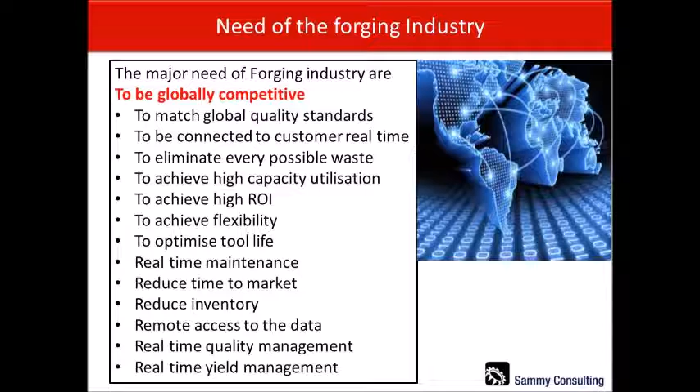Forging is a very high labor intensive and energy intensive process. It is very important that in order to be globally competitive, all kinds of waste from the processes have to be eliminated. This can be done by taking real-time decisions on the shop floor or in the engineering function, and IoT has a big role to play.

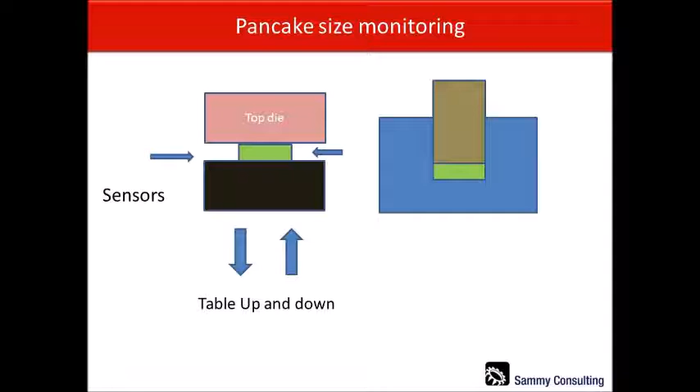In this example, you can see that the sensors are measuring the volume of the die and the weight of the forging, and this information is given in real time to the cutting machine in order to calibrate itself and cut the blanks as per the volume required of the forging die. In such a case, the average weight of the forging goes down, giving at least 2 to 3% saving on the cut weight of the component.

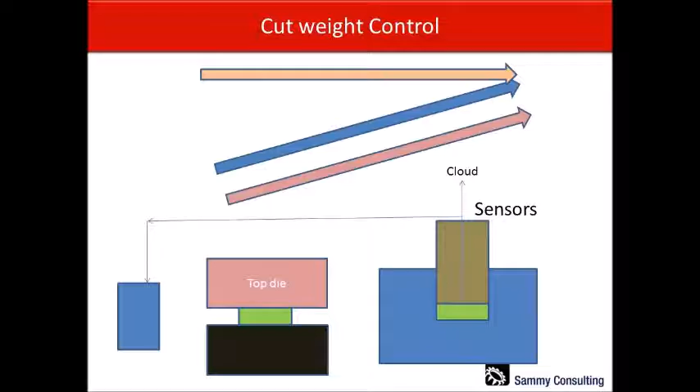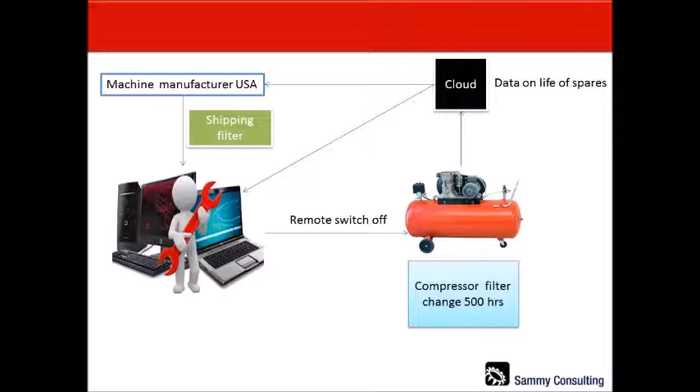This one is an example of maintenance of equipment. As per TPM, if we have decided to change the filter in 500 hours for this compressor, after 500 hours the sensor will give information through SMS or other media to the maintenance manager, who remotely can give instruction to stop the machine, order the filters, or change the filters of the machine, and the machine manufacturer can also keep a record of the same.

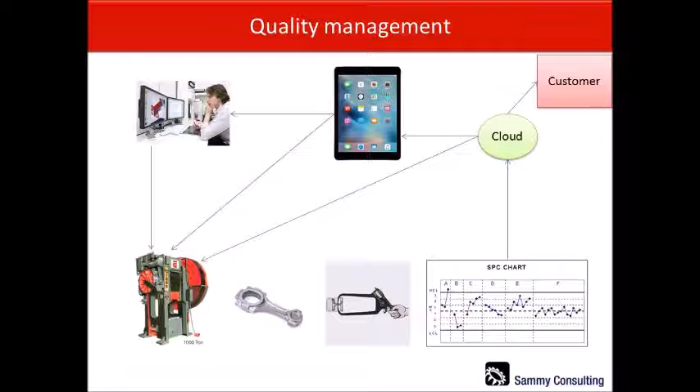This one is the example of online inspection of a variable called thickness, where you measure the hot component with a pistol caliper, and the information is sent to the cloud where the data can be processed into SPC charts. These charts can be used by customers, designers, and quality inspectors in order to come to certain decisions and also maintain traceability of the process, and this is a very useful tool.

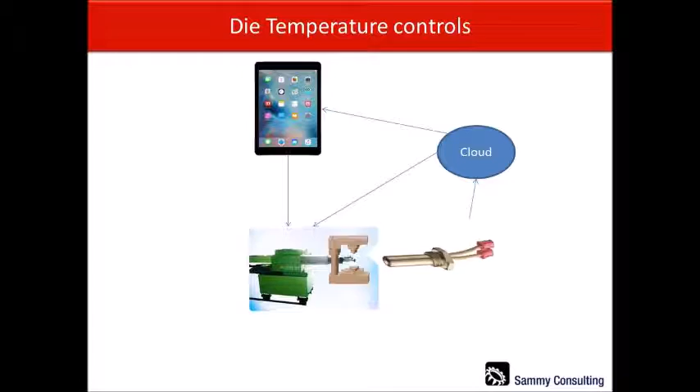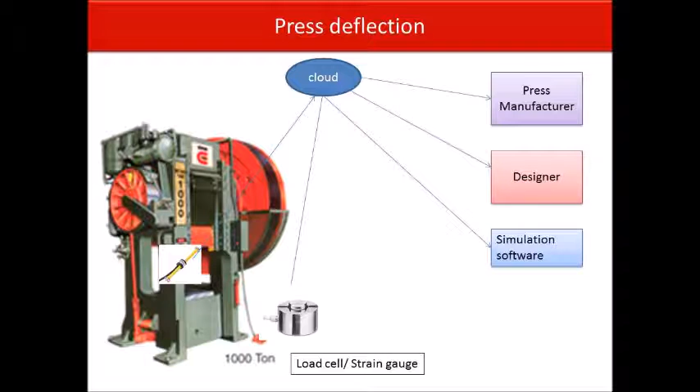The press deflection also plays a major part in the variable that is the thickness of the component. You can use load cell strain gauges on the columns of the presses to measure the deflection taking place in the press, and this data can be shared with the press manufacturer, the designer, and the simulation software designer, who can take real-time data and calibrate their simulation software for a particular equipment.

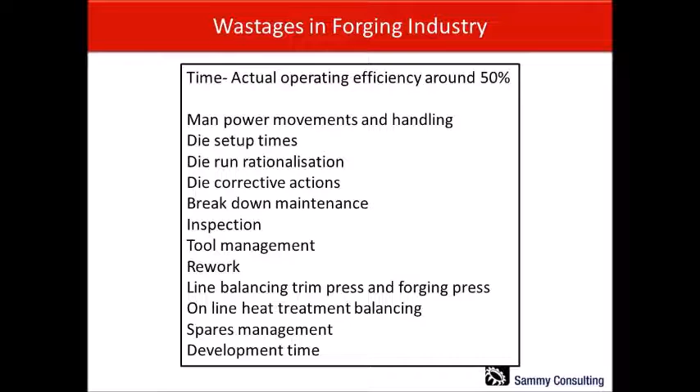Wastages in the forging industry: the actual operating efficiency of any forge would be 50%, due to time wastages from longer die setup times, die corrective actions, breakdown maintenance, delays in inspection, tool management and tool life, development times, spares management, and line balancing of the machines. Real-time corrective actions can really reduce these wastages and improve the operating efficiency.

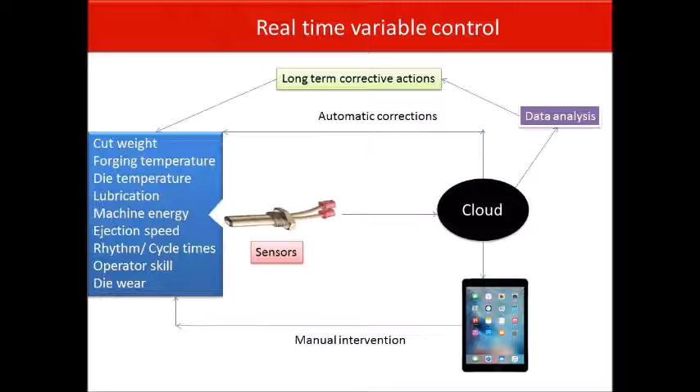Real-time variable control: there are various variables which ultimately control the quality of the forging, like cut weight, forging temperature, die temperature, lubrication, machine energy, ejection speed, operator skills, die wears, etc. Various sensors can pass information to the cloud, allowing manual intervention or automatic correction to take place, and the cloud can analyze this data to help take long-term corrective actions.

There are four major revolutions in industrialization. First is mechanization, second was mass production, third was computer and automation, and fourth is cyber physical systems, which we call IoT. Industry 4 is evolving as a standard or norm to bring consistency in the usage of IoT. There are several software and hardware participants in this IoT revolution, and Industry 4 can help bring standardization among them.

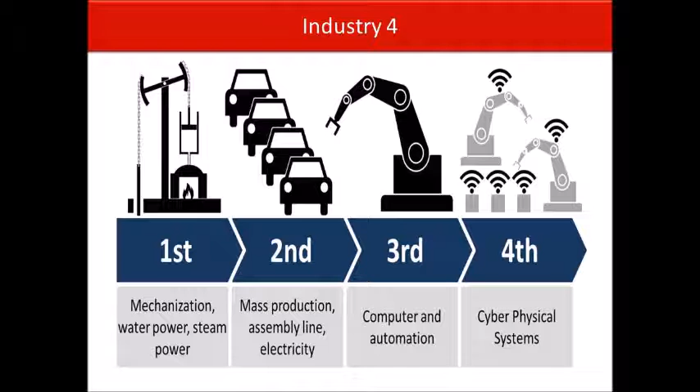Industry 4, or the fourth industrial revolution, is a collective term embracing a number of contemporary automation, data exchange, and manufacturing technologies. Industry 4 facilitates the vision and execution of a smart factory. The term originates from a project in the high-tech strategy of the German government, which promotes the computerization of manufacturing. It is evolving as a standard which can be evaluated, validated, and implemented throughout the organization.

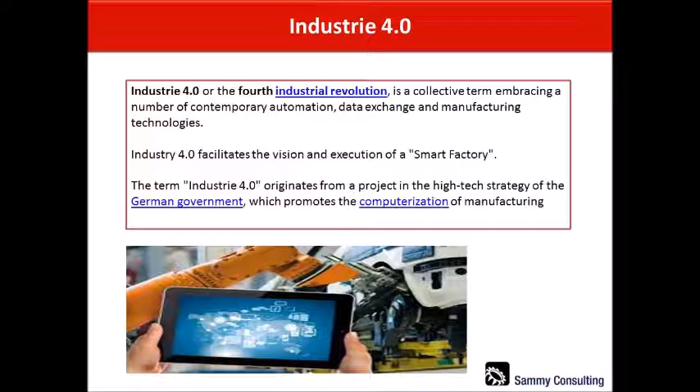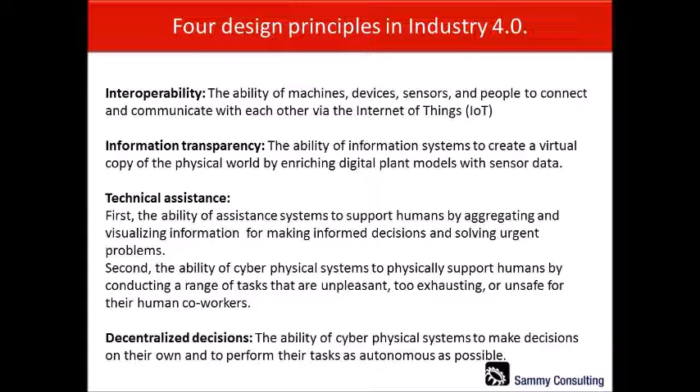There are four design principles in Industry 4. One is the ability of machine, device, sensor, and people to connect and communicate with each other. Second, the ability of information systems to create a virtual copy of the physical world by enriching digital plant models with sensor data. Third is technical assistance in order to take autonomous decisions or decisions based on human intervention. Fourth is decentralized decision, that is the ability of cyber physical systems to make decisions on their own and to perform their tasks as autonomously as possible.

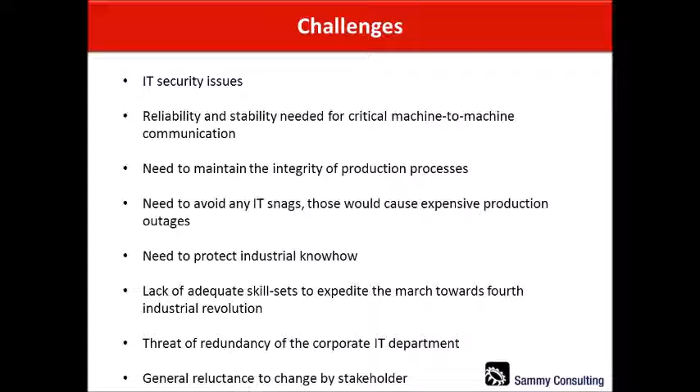There are several challenges like IT security issues, reliability and stability, need to maintain the integrity of the production process, need to avoid any IT snags, need to protect industrial know-how, lack of adequate skill sets, threat of redundancy of the corporate IT department, and general reluctance to change by stakeholders. These challenges have to be countered over a period of time for it to evolve as the only standard.

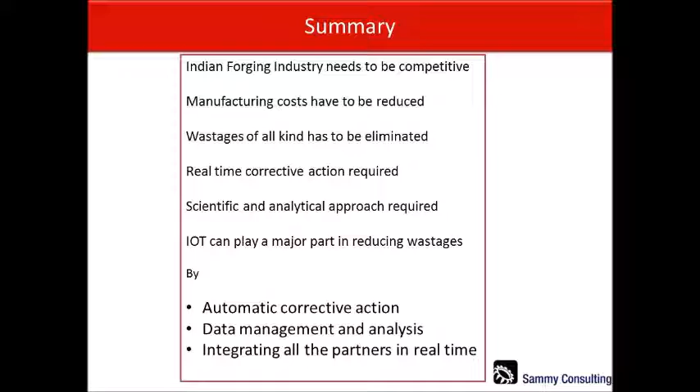So finally, to summarize, the Indian forging industry needs to be competitive. Manufacturing costs have to be reduced, wastages of all kinds have to be eliminated, real-time corrective actions are required, and a scientific and analytical approach is required. IoT can play a major part in reducing wastages by automatic corrective actions, data management and analysis, and integrating all the partners in real time.